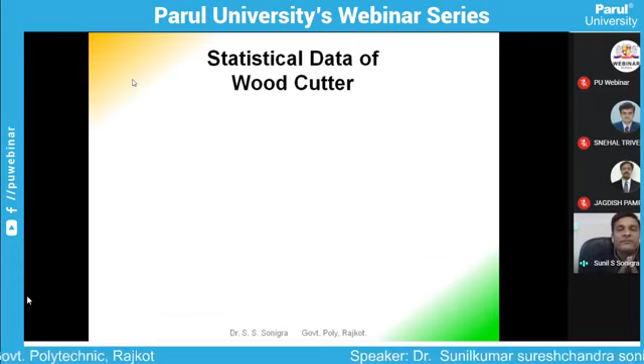Now, before starting today's presentation, let me discuss why we have arranged such kind of discussion. Why you will spare your 1 hour with me online, and what is the output of today's discussion. So for that, let me give you one story about a woodcutter. Once upon a time, there was a woodcutter. He went to the jungle to cut the wood using his axe.

On the first day, he collected 20 kilograms of wood. On the second day, he gathered 19 kilograms of wood. On the third day, he went to the jungle with the same axe, with the same enthusiasm, in the same area, and there is a reduction in amount of output. The wood quantity reduced day by day, gradually. So, for example, on the fifth day, 16 kilograms, and so on.

So can you think why this has happened? What could be the reason for the reduction of this quantity? On the first day it was 20 kilograms, and on the 10th day it was reduced to almost 50%. So anyone can tell me what would be the reason for this reduction?

Excuse me, sir. Is it a two-way communication or should only I speak? Jagdish, sir. Yes, sir. A two-way is possible, no? Sir, actually not. This is only one way. Okay, no problem. So I will ask you questions, and then I will also reply with the answer to my question, right? Okay.

Students, please think about the answer. I will give you the answer. Here the answer is the woodcutter forgot to resharpen his axe. With day-by-day usage, the edge of the axe deteriorated. So hence we need to resharpen our axe in our day-to-day life.

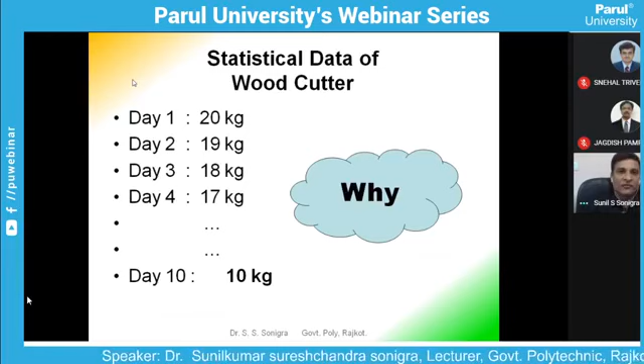Whatever we do, our work, we have to restructure it. We have to resharpen it. And how should we resharpen it? That is by redoing any work. Now I am showing you some of the components. You may think of these components. Now tell me what would be the process of manufacturing whenever you have to produce such kind of component.

Now as an engineer, whenever you go into the field, you may be asked such types of questions. For example, in an interview, people may ask, this is the component, explain how you will manufacture this? What would be the first manufacturing process, and subsequently how will you produce such kind of product? At that time, we have to recall our first semester or first year subjects.

That is, we learned about machining processes, lathe machine, drilling, milling, turning, grinding, slotting machine, shaping machine, planing machine. So we may think about those machines, but it's difficult to manufacture such kind of components using those conventional manufacturing processes. So the answer to this question lies in the non-traditional manufacturing processes. We have to go for non-traditional manufacturing processes to produce this type of components. And that is today's outcome.

What are non-traditional manufacturing processes? You might have learned some content about this title somewhere. In a single word, I can say that if we cut the wood, what that woodcutter did, if I cut the wood without using an axe, means without using any sharp cutting tool, that process is called non-conventional manufacturing processes.

There is no mechanical contact between the workpiece and the tool. We remove excess material by using other methods. Now, which are those methods, and what are the basic principles of these methods, we'll discuss later on.

Why should we go for non-traditional machining processes? The reason is that traditional manufacturing processes have some drawbacks. Suppose you use a lathe machine, drilling machine, or milling machine. In those machining processes, tool wear is the biggest problem. You need to resharpen the tool every time, or you have to change the tool. Then the second problem is that surface finish is very limited.

To have higher surface finish, we have to go for better machining processes. For machining harder material, a harder tool is needed, so that is also not economical in some cases. And we cannot machine complex surfaces efficiently by conventional machining processes. So to overcome these four drawbacks, we have to go for non-traditional manufacturing processes.

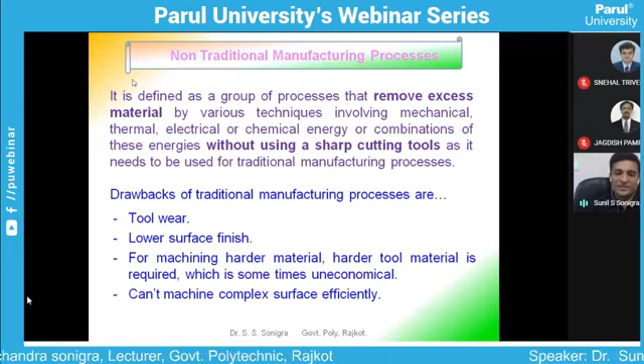We will see some animations about NTM processes. Now let me explain the advantages, why we should go for these NTM processes. The first advantage is that we can machine the hardest material using this method, whatever its hardness. The second advantage is that we can have better surface finish with a small tolerance.

Then, the workpiece can be heat sensitive in this case. For forming complex parts, we go for NTM processes. And whenever the workpiece is too slender or too flexible, it flexes because of the clamping; at that time also we use NTM processes. The various NTM processes we will discuss today are ultrasonic machining, laser beam machining, water jet machining, abrasive water jet machining, electro discharge machining, electrochemical machining process, etc.

Now first we discuss ultrasonic machining. Before discussing this, I would like to tell you that some words are very important as far as engineering is concerned. Suppose after completing your graduation, you may have to appear in competitive examinations or interviews, or you may go for your own business, or go abroad. Everywhere, as a mechanical engineer, you should know a few words that I am emphasizing and highlighting. For example, as a mechanical engineer, you should know what ultrasonic machining is, not in detail, just in simple words.

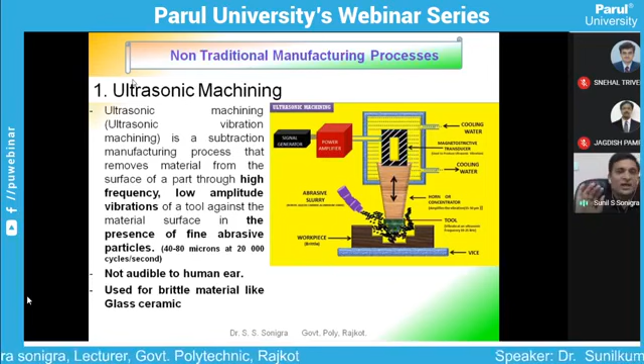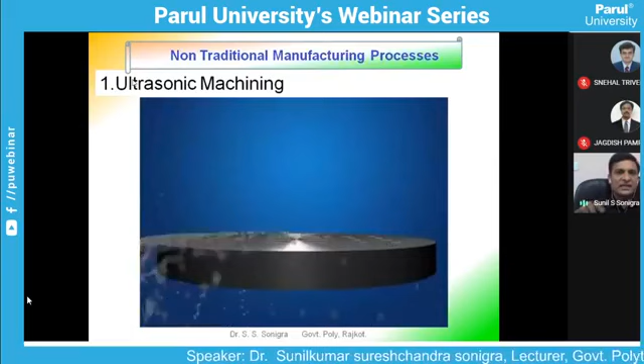It is used for brittle materials like glass and ceramics. Nowadays the usage of glass has increased vastly; in every field, glass is widely used. So cutting glass becomes a challenge, and at that time USM is useful. This is another exaggerated view of ultrasonic machining, where you can see the vibration frequency is very high and the amplitude is very small.

In competitive exams, you also have to remember these words: that abrasive slurry is used, the amount of vibration is very high, and what material is used as slurry. Slurry means a semi-gel or liquid in which some small particles are added, normally boron carbide, boron nitride, aluminum oxide, silicon carbide, and diamond dust. Any of these materials can be used as an abrasive slurry.

We use this ultrasonic machining for hard and brittle material like ferrite, quartz, alumina, piezo ceramics, ceramic matrix, carbide, etc. In this case, the tool is made up of a soft material because it is not needed that the tool must be harder, since there is no mechanical contact between tool and workpiece. The tool remains away from the workpiece.

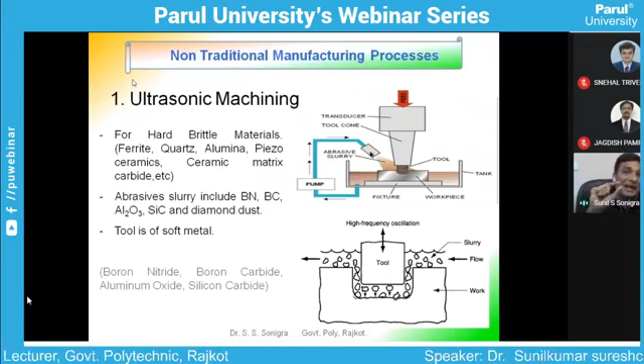The gap is maintained, and in this gap an abrasive slurry moves continuously as shown in this diagram.

Some advantages of using ultrasonic machining: the initial cost is low compared to other non-traditional machining processes. Non-toxic fumes are produced, so there is no hazardous problem. No heat is generated, so there is no thermal stress. It's very safe to use this process to remove material from the workpiece.

Now let's think about disadvantages. In this machine, material removal rate is very slow. We cannot do fast machining as we do in milling or turning. Overall machining cost is high because of limited usage across components. Sharp corners cannot be machined using this process, and tool wear rate is higher because we need to change the slurry every time, adding to overall machining cost.

Now I am showing you a 3D animation of ultrasonic machining. This is an ultrasonic machine model. Here also, this vibration amount is very slow. This is abrasive slurry, and this is the workpiece.

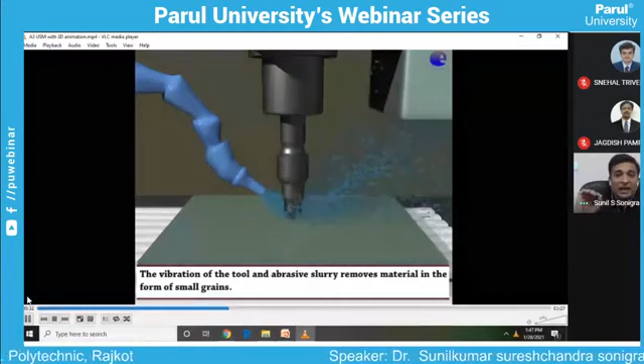In this machining, the tool vibrates at a very high frequency, an ultrasonic frequency of 20,000 to 30,000 cycles per second. The vibration of the tool with abrasive slurry removes material in the form of small grains. This is the machined surface of the workpiece using ultrasonic machining.

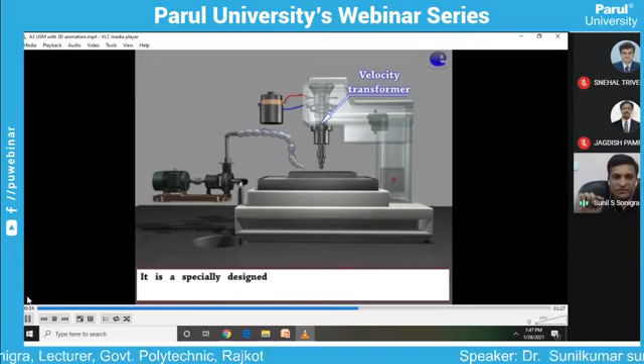This is a three-dimensional model of ultrasonic machining. Of course this is a model, not the actual machine. The actual machine was shown in an earlier PPT.

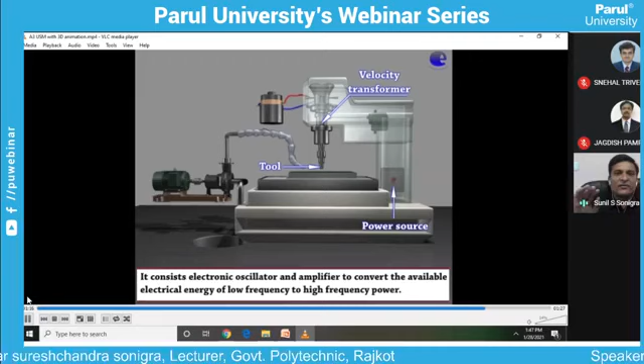This is a velocity transformer through which the vibration frequency is increased, and this is the tool. Here the power source gives the electronic oscillator and amplifier to convert available electrical energy into vibration frequency, and it converts electrical energy into mechanical vibration using this transducer.

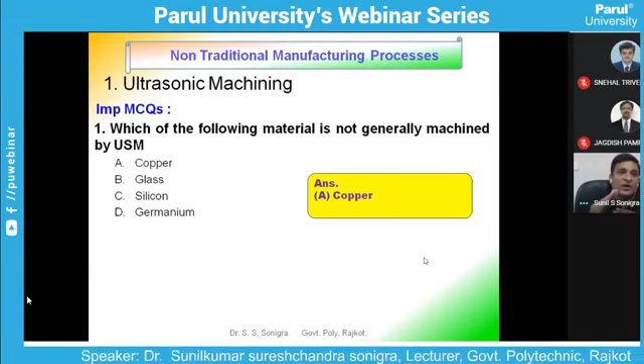So from this USM topic, what are the important MCQs that may be asked in competitive exams or interviews? First question: which material is generally not machined by ultrasonic machining process? The correct answer is copper, because we can cut glass, silicon... steel is used as a tool.

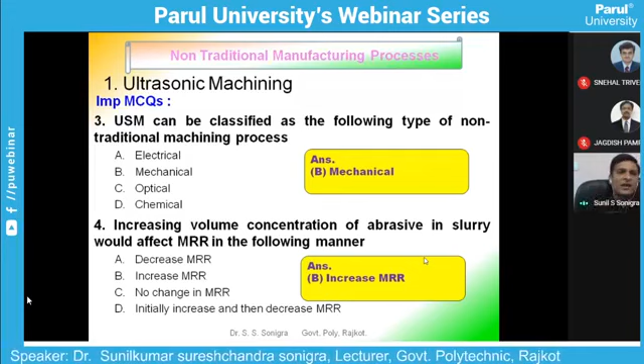These are just four simple questions. If you understand the thorough concept, numerous objective questions can be found from this topic.

Now second is LBM, that is laser beam machining process. As we know, the full form of laser is Light Amplification by Stimulated Emission of Radiation. This question may be asked in competitive exams numerous times.

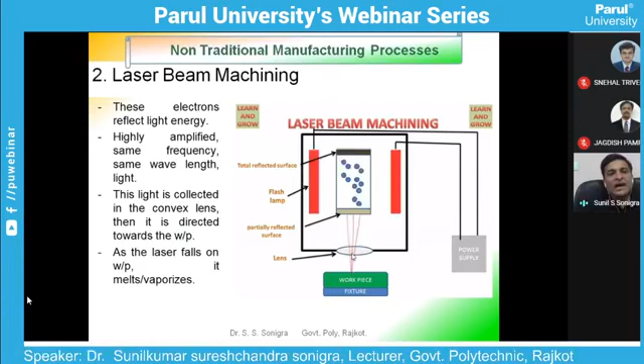Whenever these flash lamps excite these electrons, they start emitting a light wave with high amplitude, same frequency, and same wavelength. That light is collected using this convex lens, gathered here, and this concentrated laser beam imparts on the upper surface of the workpiece. Because of this imparting of laser beam, the temperature increases, and because of this increase in temperature, the surface of the workpiece material will either melt down or be vaporized. This is the actual line diagram of LBM machining process.

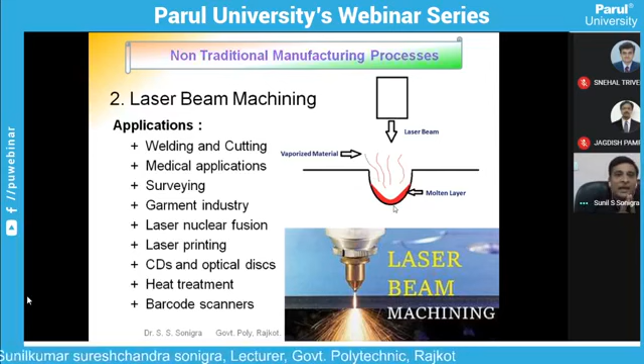And these are the applications of LBM, laser beam machining process. It is used in welding and cutting, medical applications, garment industries, laser nuclear fusion, laser printing, CDs and optical discs, heat treatment, and barcode scanners. N number of applications are there of using this LBM - just you should remember at least 3 to 4.

Whenever you go for interview, you may be asked to express where LBM is used, or show where laser beam machining can be used. At that time, you should be able to reply with at least 2 to 3 sentences about the LBM process. Now let me show you how LBM welding is done in actual practice.

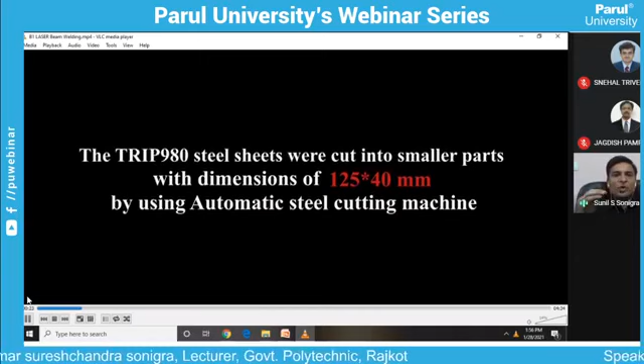This is a model of preparing a sample of steel plates having certain thickness and width of 40 millimeter, and these steel plates are joined using laser beam welding process. If you see this video properly, you will be able to express your views in interview about the application of laser beam welding and how to prepare the raw material for LBM process.

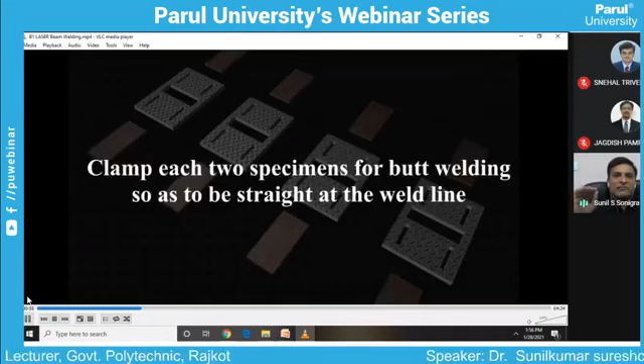Here first, these two plates are cut in various shapes. Here 4 experiments are performed with variable speed - speed is altered every time. The length is 125 millimeter and width is 40 millimeter, and 2 specimens are joined by butt welding so as to have a straight finish like this. This is the clamping device that is mounted over this welding process.

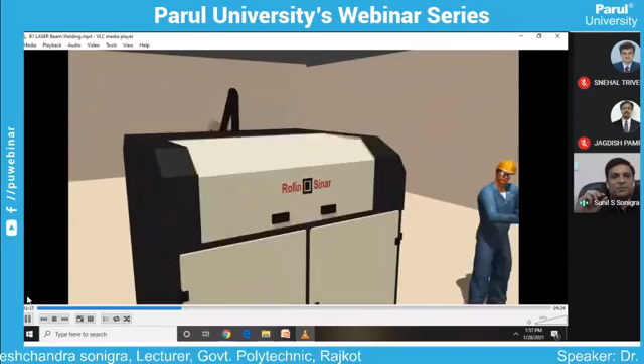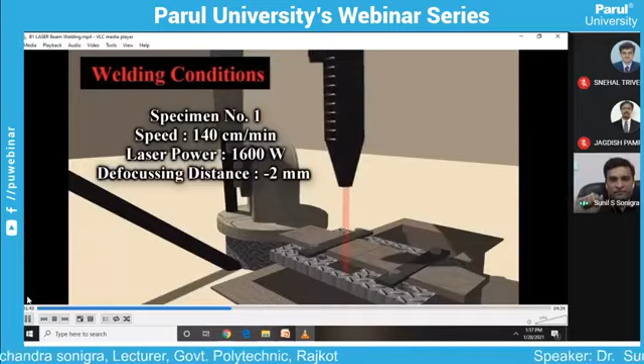Nd:YAG is used as the laser material. This is the region where the laser beam is produced. In industry, wherever laser beam is produced, that area is taken outside in a very safe place, and normally nobody is allowed to enter that region. This is a laser head, and here the laser beam machining process is going on with a speed of 140 centimeter per minute. It uses 1600 watt of laser power, and defocusing distance is -2 millimeter.

Right, so that is LBM, another application of laser beam welding process. Now the third process, that is water jet machining process.

Can you imagine a simple jet of water can cut a thick material? It's difficult to imagine, but let me show how the jet of water can remove material from any hard material. A high pressurized water is used, about 150 to 400 megapascal - too high pressure - and the velocity of the jet is about 800 meters per second, which is around 3000 kilometers per hour. Normal speed of an aeroplane is 800 to 900 kilometers per hour, so this is around 4 times higher speed than an aeroplane. That much velocity is given to the water, and it can cut extremely thick parts, about 5 to 10 inches.

The thickness of material depends upon the speed of the water jet, and tolerance of about 50 micron is achieved using water jet machining process. It is also used for deburring, trimming, cleaning, and polishing operations.

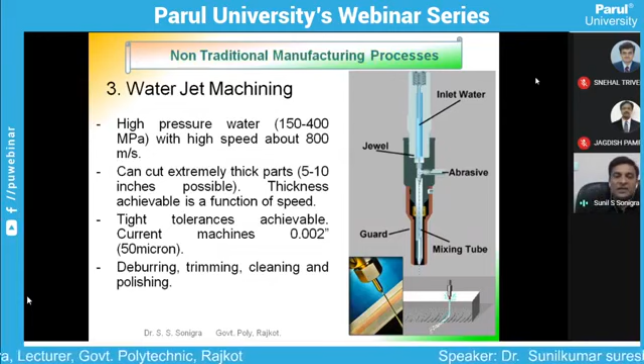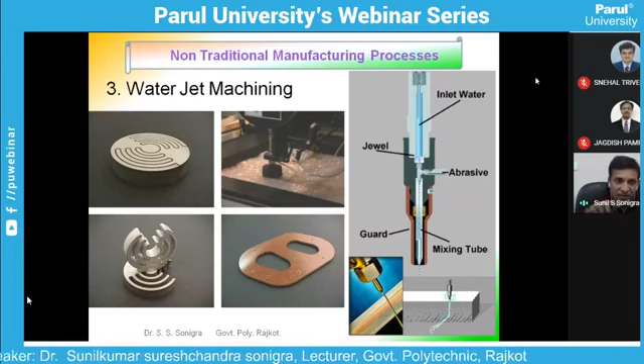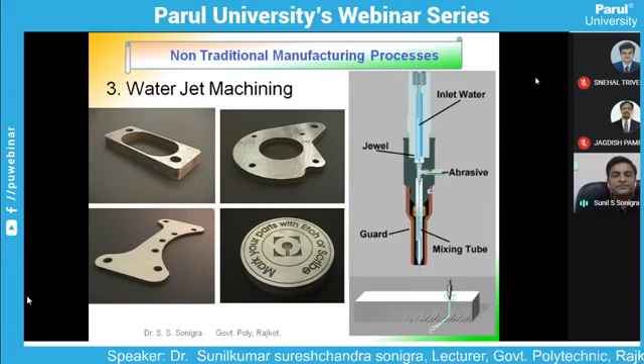These are workpieces prepared using water jet machining process. If you use traditional machining process, it would be very difficult to machine components like this, but using WJM we can easily remove the material. These are another 4 components actually made by water jet machining process. You can see these components are very complicated, but they can be easily machined by water jet machining.

Applications of water jet machining include cutting thin non-metallic sheets. It is used in food industries, to cut rubber, wood, ceramic, and other soft materials. WJM is widely used in circuit board cutting, paint removal, and to cut thick glass sheets.

It is a very difficult task for any industry person to cut glass with good accuracy, because glass is a very brittle material. If you use any conventional machining process to cut glass, definitely you will fail. So at that time, water jet machining process is highly advisable.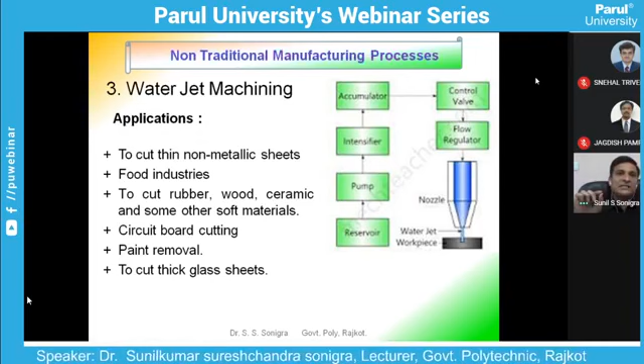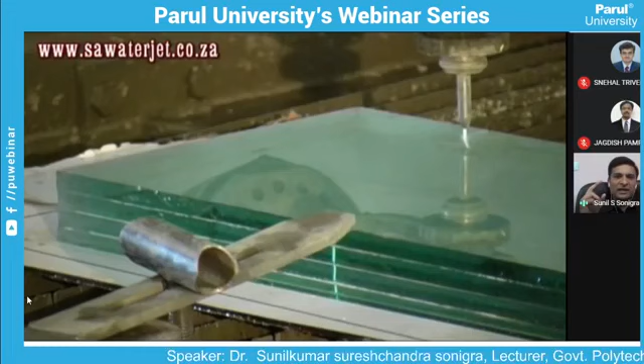Now let me show how 38 millimeter thick bulletproof glass is cut by water jet machining process. This is a bulletproof glass. In actual practice, no glass is truly bulletproof - bullet means any bullet thrown through a gun. If you fire a bullet near any glass, it will break down, but accuracy will not be there.

You can see here a 38 millimeter thick bulletproof glass that has been cut easily by this water jet machining process. This is the jet of water with very high velocity, about 900 meters per second, which is much higher than the speed of an aeroplane or any jet plane. The pressure of this water is about 200 to 400 megapascal, which is also a tremendous pressure employed to this water.

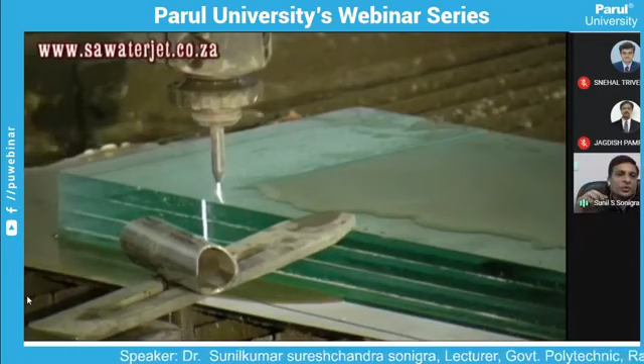Sometimes an abrasive slurry is also used, mixed with the water to achieve better surface finish. So this bulletproof glass is cut using this simple water jet.

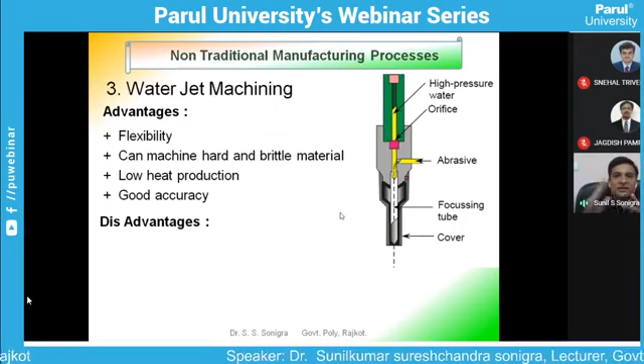Advantages and disadvantages of using water jet machining are also very important questions - any interviewer may ask you to explain the advantages of water jet machining. First, it's highly flexible - you can use water jet machining anywhere in the field. You can machine any hard and brittle material, like glass, with very good surface finish. Heat production rate is very less, so there would be no thermal stress in the component, and accuracy is also very good in case of water jet machining process.

There are certain disadvantages of using this machining. First is a very slow material removal rate as compared to other machining processes. Sometimes it produces a taper cut - if depth is too high, then the taper shape would be there. That is another disadvantage of using this machining process.

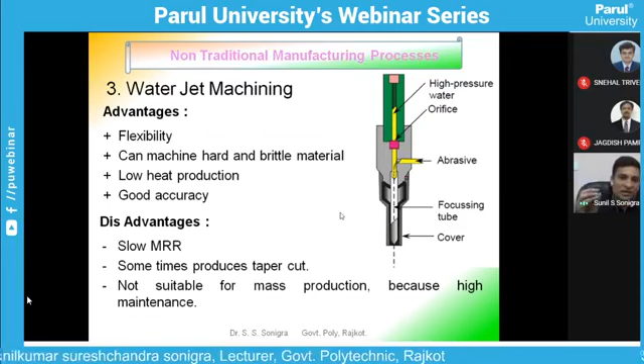This is not suitable for mass production because of very high maintenance. This machine needs very long and very frequent maintenance, so we cannot use it for mass production.

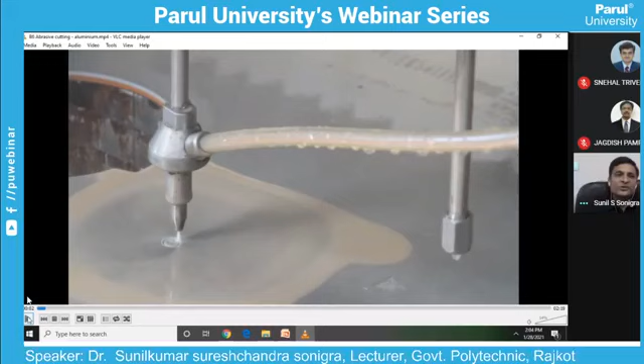Another big advantage of using this WJM is that we can also cut aluminum. Even in industry, aluminum cutting is a big challenge because aluminum is a very soft material and its density is also very less. Whenever we machine an aluminum sheet, it will bend, or the aluminum material will stick to the cutting tool, and hence conventional machining would be difficult to produce such components.

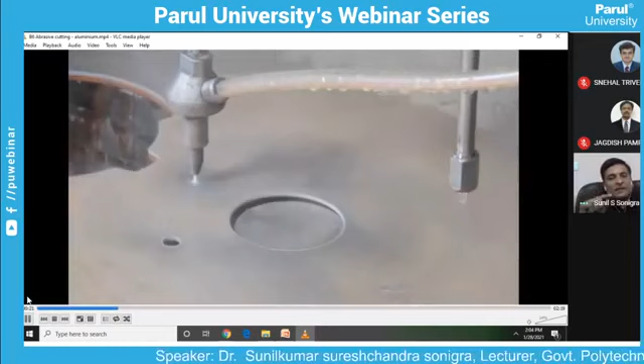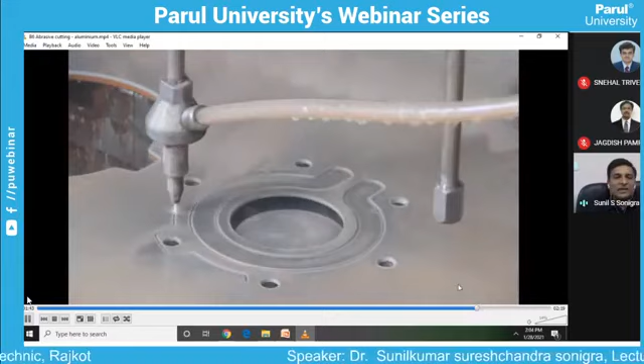So at that time, abrasive cutting is advisable. You can see this aluminum sheet is cut using this abrasive cutting tool with very high accuracy, and the shape may be of any complexity. It can easily cut like this. I am forwarding this clip because there is no need to see all the steps; just you can see the final product.

There is no heating process, and hence no thermal stress would be there in this component, as well as no mechanical stress. If you produce this type of component by conventional machining processes, then at the edges there may be stresses.

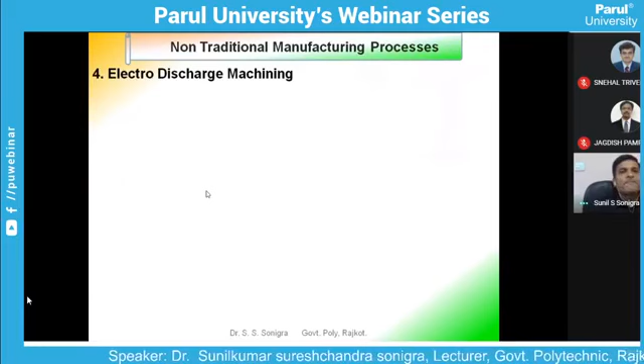Now, the fourth process is electro discharge machining, EDM. In this process, a simple spark is used to remove material. To understand the working principle, think about sparking of two wires. If I use DC power and join two wires, what will happen? If I start the power supply and join two wires, a spark will be there.

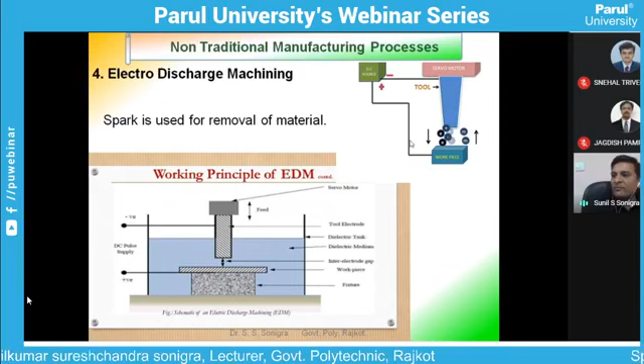So that spark is used to remove material. Now, how to produce this spark between the cutting tool and workpiece? Here is the mechanism: this is the tool, this is the workpiece, and both are connected to a DC power source. Negative supply is given to the tool and positive supply to the workpiece. This tool and workpiece are separated by a small gap, an inter-electrode gap, which produces very great resistance. Because of this high resistance, electricity is produced, heat is generated, and that heat is used to remove material from the workpiece.

This is electro discharge machining shown with an exaggerated view.

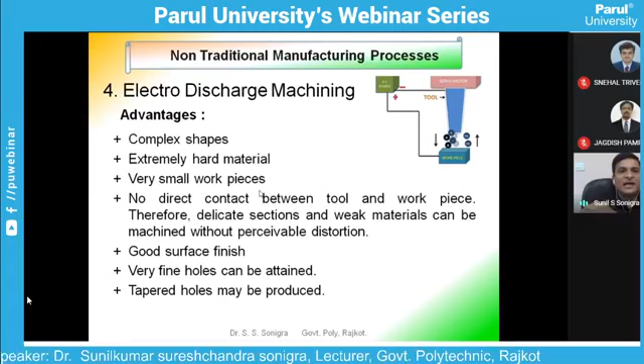Now let's see the advantages of the EDM machine. We can machine any complex shape. Extremely hard material can be cut using this EDM process. A very small workpiece can be machined. There is no direct contact between tool and workpiece, hence no need for any mechanical or thermal stress. Weak materials can be machined easily without any distortion. Good surface finish would be there. Very fine holes can be attained, and taper holes may also be produced using this EDM process.

There are certain disadvantages of using this machining. The first is slow material removal rate. In NTM processes, slow MRR is always the case; you can write blindly that MRR is slow because it takes a very long time to cut material, since they are doing elementary cutting—atomic and molecular cutting—hence it's a very slow process. This also needs skilled experts, as any layman cannot use this machine. Higher power consumption and higher tool wear would be there. Reproducing sharp corners is not possible using this machining process, and an electrically non-conductive material cannot be machined by this process. The material to be cut should be electrically conducting.

This machining process is used in applications such as small hole drilling, die making, pipe industry, automotive industries, and aircraft engine production—everywhere. EDM is widely used.

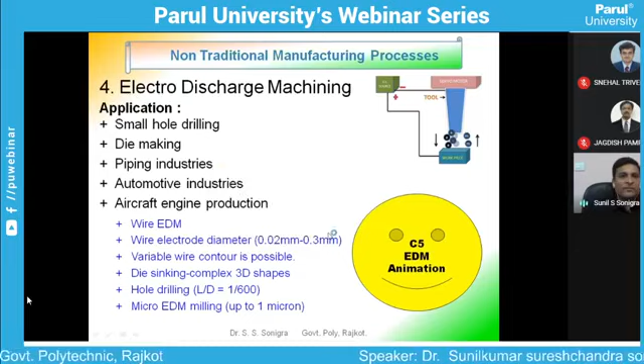Now, these are some important terms to know about electro discharge machining: wire electrode diameter, variable wire contour, die sinking, and hole drilling. I would like to show you these steps with a small video clip, as these words are new to us in EDM machining.

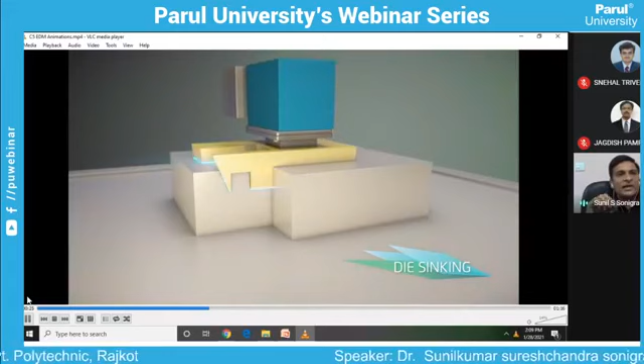This is a component; the wire EDM process is going on in this view. This is just a model. This is the wire electrode diameter, about 20 micron—a very small dimension—which is also possible using EDM processes. We can drill a hole of very small diameter, about 50 micron, using this machining process. Any 3D complex shapes can be machined using this process.

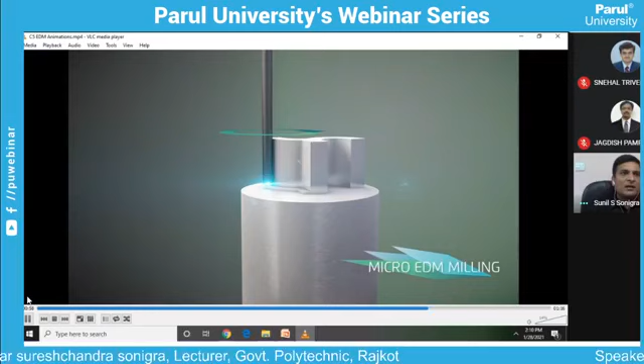Hole drilling is also possible by this EDM process. You can see here the length-to-diameter ratio of the hole is 600 times. Means we can drill a hole up to 600 millimeters if the diameter is 1 millimeter, right? So 1:600 is the ratio of this electro discharge machining process.

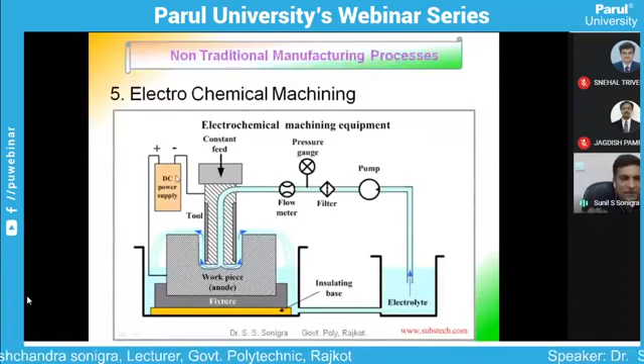To understand this process, let me recall the anode and cathode reaction process. This tool is connected to DC power supply and workpiece is connected to DC power supply with positive charge. So what will happen here? Let me take one example. We are machining a low carbon steel, say ferrous alloy, right? So here workpiece is made up of ferrous alloy and a slurry, that is an electrolyte, is used. As an electrolyte, we use water and a neutral salt mixture. So that is spread in between workpiece and this tool.

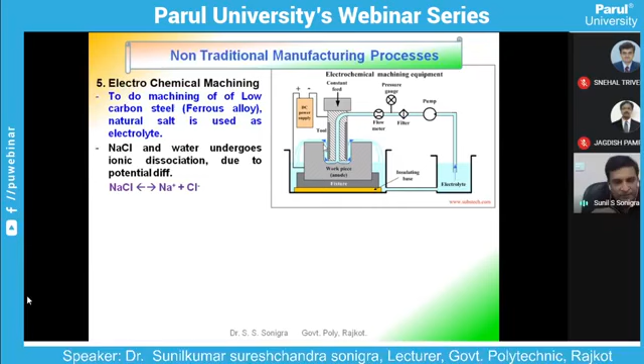And whenever NaCl and water come into contact, they make an ionic dissociation. NaCl becomes Na+ and Cl-, and water becomes H+ and OH- ions. This is the ionization of water whenever we add salt in the water, that we have learned in 5th or 6th standard, right? Now this basic principle is used in electrochemical machining process. How is that principle used?

Whenever potential difference is applied between workpiece and tool, workpiece works as an anode and tool works as a cathode, right? So positive ions in this electrolyte will be attracted towards cathode, that is tool, and negative ions, that is chlorine and hydroxide, OH-, will be attracted towards anode, that is workpiece. So what will happen?

Hydrogen ion will go to cathode here at the tool. This H+ will go to this tool. Then from the tool, it will take away electrons like this. This is the equation to show this reaction: 2H+ plus 2 electrons makes hydrogen gas at the cathode. So always in this process, at tool, hydrogen gas will be formed by this reaction, and the negative ions, Cl- and OH-, will be attracted towards the workpiece.

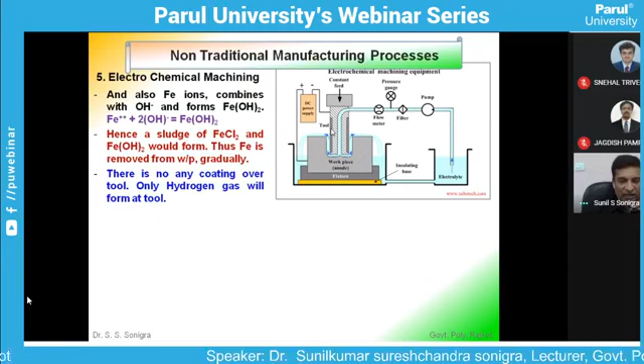So once Fe is removed and a sludge is formed over the surface, it will be settled at the bottom of this tank. So we need to remove that sludge frequently, and thus Fe is removed from workpiece in a very gradual way. So there is no coating over any tool, only hydrogen is produced at the tool, that is working as a cathode, and Fe is removed at an atomic level. We are removing atoms one by one.

Because of this type of removal, the surface finish is extremely good, the process is very slow, and there is zero stress over the surface of that material. No thermal stress is there, no mechanical stress is there. Excellent surface finish is possible using this electrochemical machining process.

So in an interview, you may be asked to suggest the best machining process you will use for ferrous, for iron, among n number of options. At that time you can suggest that ECM is the best machining process because it removes the atoms at atomic level. This line diagram represents the movement of atoms: at workpiece Fe is there, Fe2+ combines with Cl- and OH-, and that forms sludge of FeCl2 and Fe(OH)2.

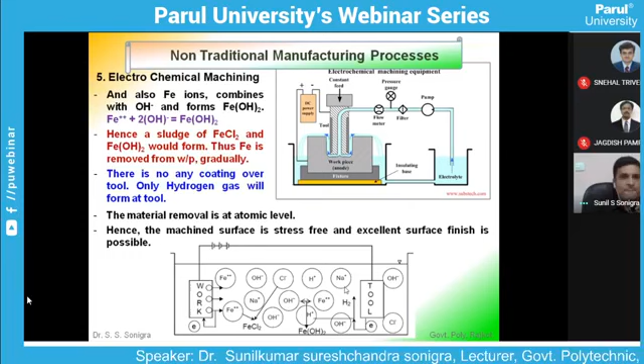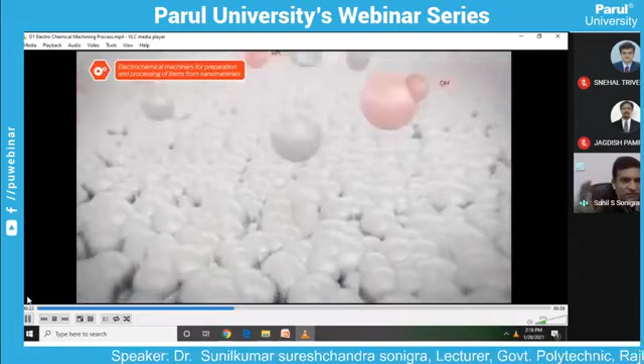And at cathode, H+ ions will go and form hydrogen gas that will escape to the atmosphere. And this process is also shown with a small video clip in this PPT. This is a machine tool, and this is a workpiece having Fe ions, and these Fe ions are combined with OH- and chlorine ions, that is Cl-.

And these white bubbles shown in this diagram are the bubbles of hydrogen gas. So there may be small bubbles of gases in this ECM machining process. So this is also another ECM machining process.

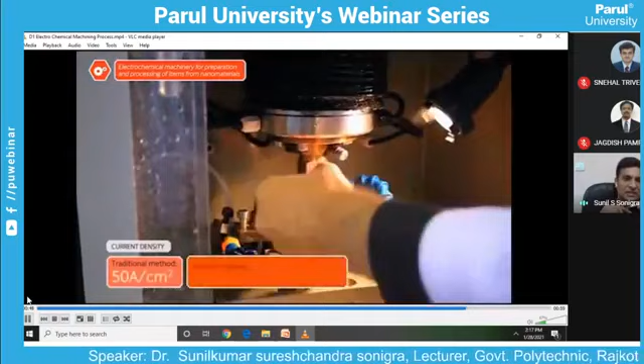I hope the ECM machining process is clear to you. The next is EBM welding process, electron beam welding process. In this process, a beam of electrons is generated, and then they are concentrated using a focusing coil in a vacuum chamber. Here a vacuum chamber is used because, due to the vacuum chamber, the accuracy of the workpiece is very much higher as compared to other machining processes.

And the vacuum chamber is needed because if we do not use a vacuum chamber, the electron beam coming from this cathode beam source may disperse around this area. So in this case, the vacuum chamber is mandatory.

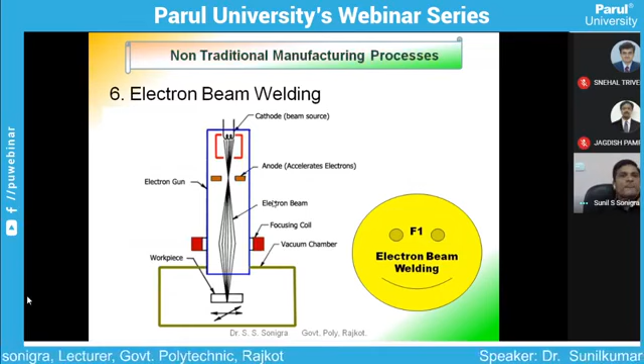Now let us see the advantages of using this EBM process. It can weld similar or dissimilar metals. Very high material joining rate is there in this welding process. Operating cost is low. No filler or flux is used. It gives very high surface finish to the weld. It can weld hard materials as well. It will have fewer welding defects because it is done in a vacuum.

The disadvantages are very high capital cost or setup cost. Size of workpiece is limited according to the vacuum chamber. We cannot weld a very big component because the vacuum chamber size is limited. More maintenance is required in this case. High skilled labor is also required, and portability is very less.

Now the next part is additive manufacturing. What do you mean by additive manufacturing? Till now we discussed how to remove material from a raw available size of material to achieve a desired shape. To achieve any desired shape, we cut the material, we remove the material and achieve the desired shape. But think in the other direction. You may add the material and achieve the desired shape. So that is called additive manufacturing.

It is totally opposite to the subtractive manufacturing methodology. Till now we discussed only subtractive manufacturing methodology. Now we discuss additive manufacturing processes. Now what additive manufacturing is, we see using this video clip. This is a component. It is also called the three-dimensional printing process.

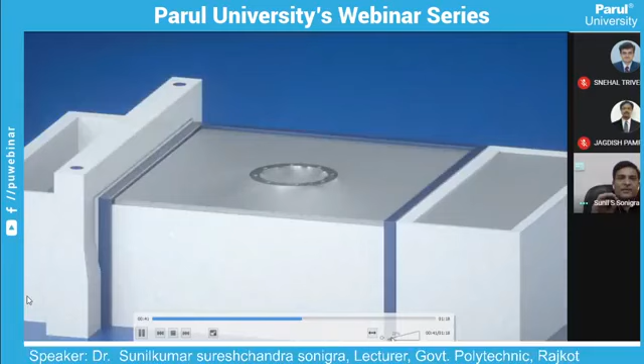In this manufacturing process, a three-dimensional model is prepared in a computer using any design software. Then a command is sent to the printer. This is a 3D printer that uses certain raw materials and a heat source, and solidifies using this cooling media, and three-dimensional components can be prepared using this process like this.

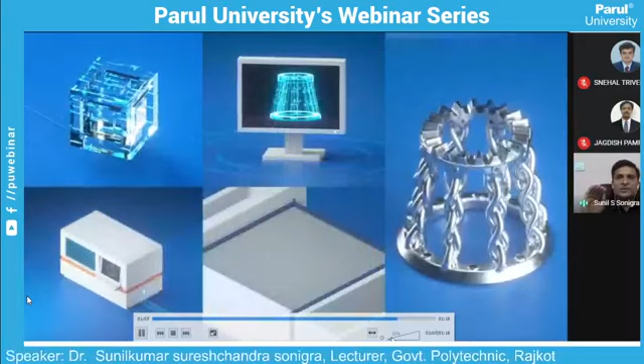You can see here any complex component can be prepared using this process. See the complexity of this part. It's very complicated, but it can be easily prepared using three-dimensional printing. And this additive manufacturing process will be revolutionary in the near future.

The advantages of using 3D printing are that it reduces material wastage; zero wastage would be there. It reduces steps of production. In a single step, the component can be prepared. Inventory reduces. Very complex parts can be manufactured easily. And certain drawbacks are also there: it uses very high energy. It's very expensive. Limited materials can be used.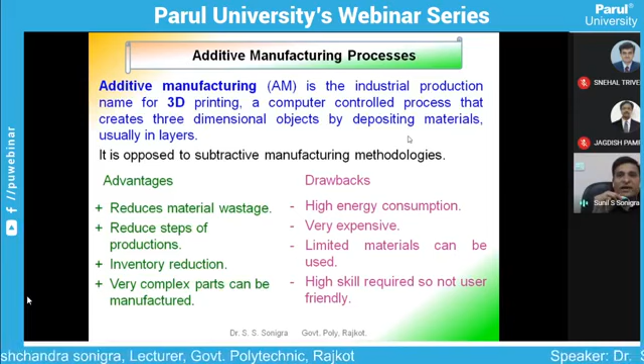Now, this is not really a drawback. It is an old saying that limited material can be used. Nowadays, 3D printing is done with lots of materials. Almost all materials are tested in three-dimensional printing machines. High skill is required, so it is not user-friendly. And 3D printers are very slow.

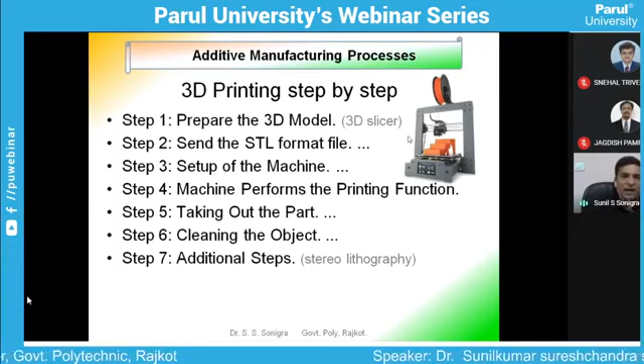These are the areas where 3D printing is applicable: fashion and retail, medical field, food, games and entertainment, pop culture, space, etc. How can it be used in the medical field? Recently, research has been done showing that tissue can be used as a raw material. So what will happen if you use the tissue of a human being as a raw material?

In future, we may produce human organs using a three-dimensional printing machine. We can produce eyes, we can produce a heart, we can produce legs, hands. Any human component may be printed, may be generated using 3D printing if we can use cells as a raw material in the 3D printing device. Of course, that is still not done, but in future it is possible that we may make any organ using

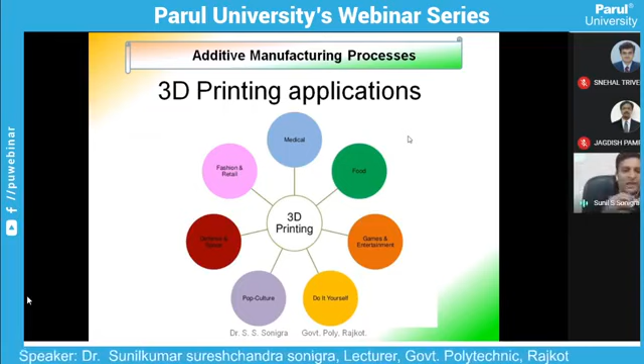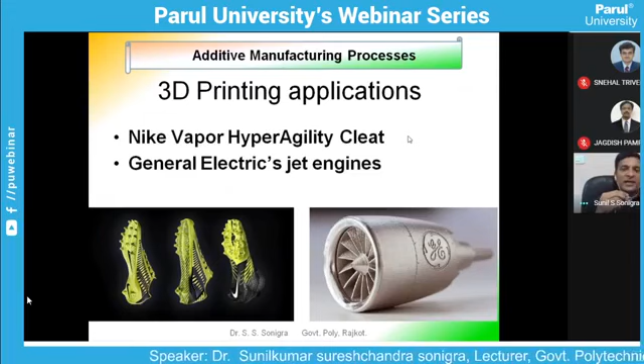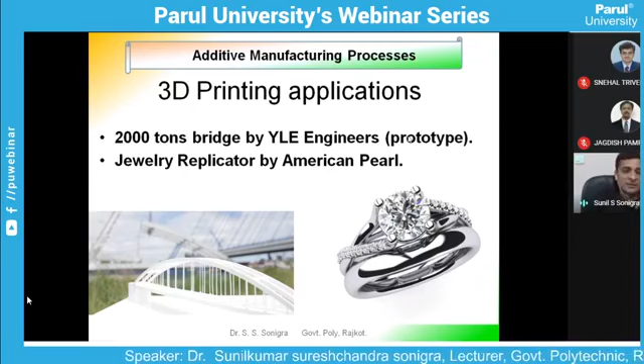These are the 3D printing materials: thermoplastic mixed with other materials like wood fibers, metal powder, glow in the dark compounds, etc. Then biomaterials are also used in 3D printers, and human organ transplantation would be possible in the near future by this 3D printing.

At this moment, I would like to give you one idea about 4D printing. Can you think about four-dimensional printing? Yes, 4D printing means make a material which will change its functionality as and when some impulse is employed. For example, you make shoes, right? Whenever a person wears those shoes and he is running with a very high speed, an amount of heating would be there. So use that kind of material that will start cooling whenever heat is supplied to that component. And because of that cooling, the person who wears those shoes feels comfortable. So that is called fourth dimensional printing or the fourth dimension of the material.

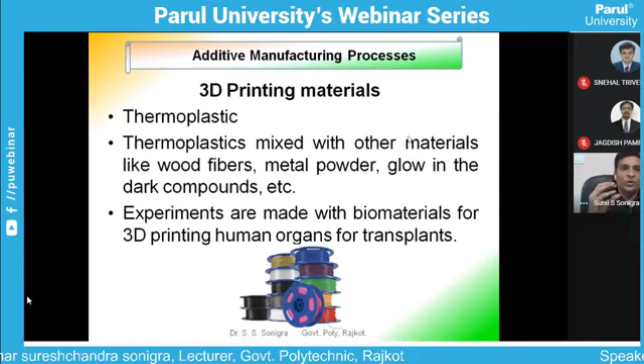In this direction, research is going on, and in about 5 to 10 years, it would be possible in our day-to-day life to use those kinds of components in our routine lives. Now about robotics, let me skip these portions.

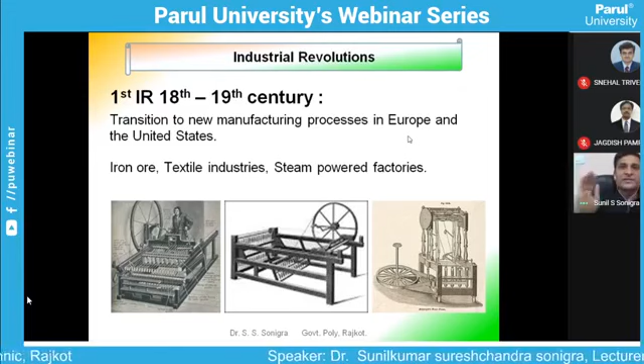Now, what is industrial revolution? Nowadays, you might have learned about the Industry 4.0 concept, right? You might be aware of this. Within 2 minutes, I will show you what the Industry 4.0 concept is. See, what is the first IR? The first industrial revolution took place in the 18th and 19th century. At that time, textile industries grew up, steam-powered factories started. From 1860 to 1920, the second revolution of industries was done. They were using mass production, car manufacturing, production of electricity, etc. That was the second industrial revolution.

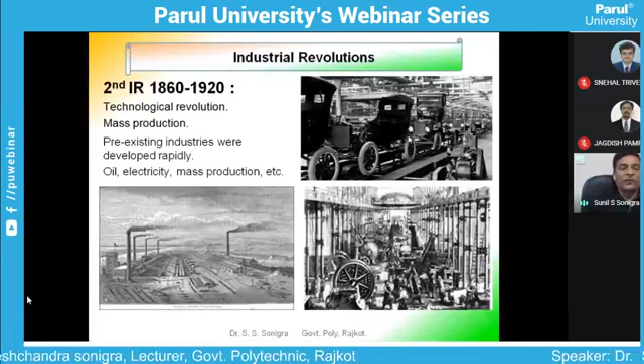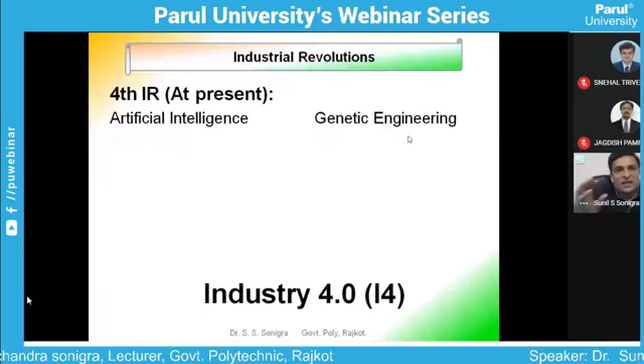The third revolution was in 1950 to 2000, where computers, internet, automated machines, communication media are used day by day in industries. Digitization was there. Cost and quality were emphasized at that time. Now in this fourth revolution, what do we do? The fourth revolution thinks about artificial intelligence, genetic engineering, Internet of Things, cloud computing, 3D printing, 4D printing, and 5D printing.

What is 5D printing? That I am leaving to you. I have discussed only the fourth dimension. You think about the fifth dimension. 5G, 6G, these all concepts are used in Industry 4.0. Means there is no need for any person in an industry. You totally use artificial intelligence. That is called Industry 4.0. Lots of discussion would be there in this session.

Now, within 1 minute, I would like to tell you how to represent your research work. Whenever you do any of your research work or any of your project work, always use third person. Don't use first person or second person. What is the meaning? Suppose you have done some problem, the solution of some problem. You write like this: I have solved this problem by algorithm. He has changed the fixture design.

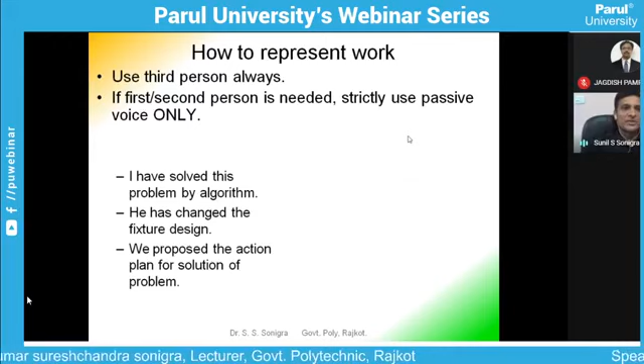These sentences must not be written in any thesis or any project or anywhere: 'We propose the action plan for solution of the problem' or 'Here I have designed new components.' Instead you should write like this: the problem is solved using an algorithm, or the fixture design is changed or altered, the action plan for solution is proposed, a new component is designed in the present work, like that. There are many examples. I am just showing you a few lines which students do mistakes on every time. I have seen many projects of students with such wrong write-ups, so you should take care about all these aspects whenever you present your research.

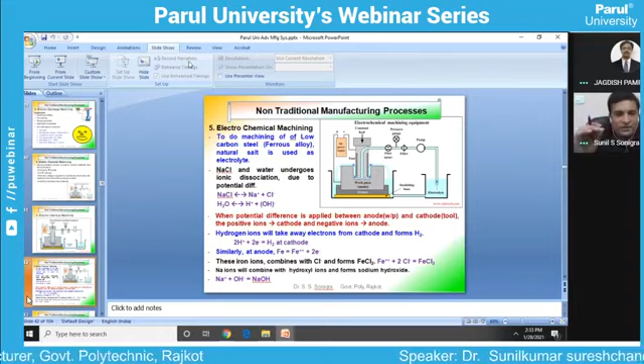The last question is, which are the micro non-conventional processes and in which field are they being used? Micro non-conventional machining processes are widely used in medical science. Suppose you need to manufacture a stent for our heart - they are using these micro nano manufacturing processes. In nano engineering also, that is widely used.

Still there are lots of questions I am getting right now, but due to the time constraint, I am unable to ask you. I will forward it to you through WhatsApp or through mail, and you please clarify those doubts. Sure. So a very big thank you, sir, for spending some time with us and giving knowledgeable information to our students. You gave basic knowledge about non-conventional processes used in industry, and also explained the concept of Industry 4.0. On behalf of Parul University, I am very thankful to you, sir, and I hope in future also you will give us this kind of webinar for our students and faculty. Thank you so much.